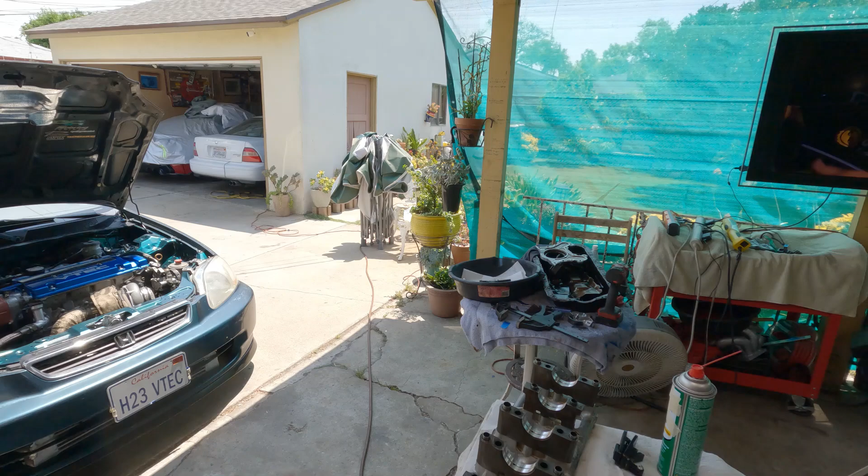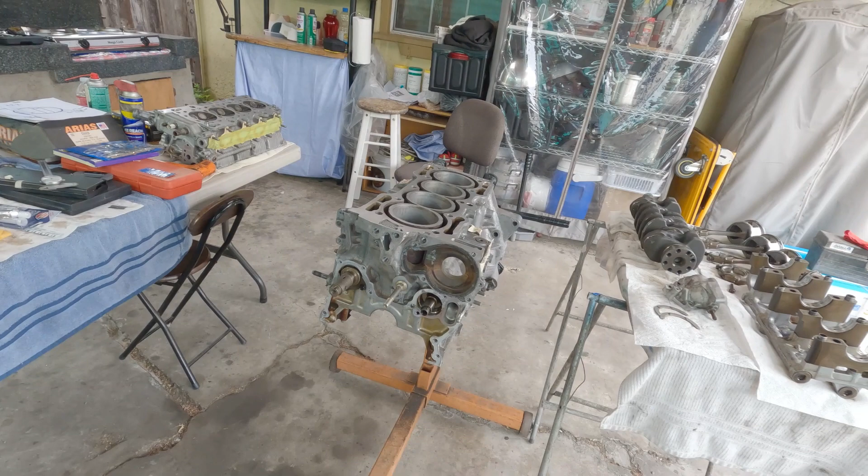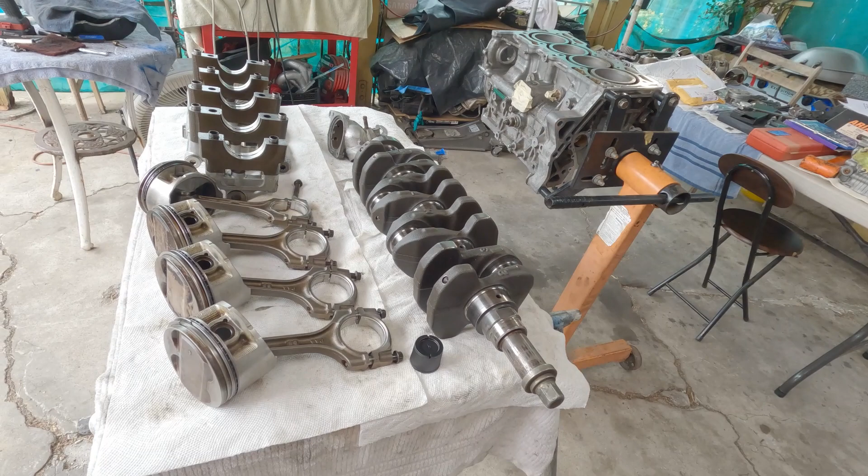Today's episode is how to build a H23 VTEC using an H22A4 block. Picked up a few pieces here and some parts showed up, so I can continue and do a rebuild on this one. And I had told you that I was going to use the same bearings because it has a few thousand miles on it, but I found out that there are a little bit of gouges on the crankshaft journal, so I have decided, oh, what the heck, just go ahead and get me a new set of bearings.

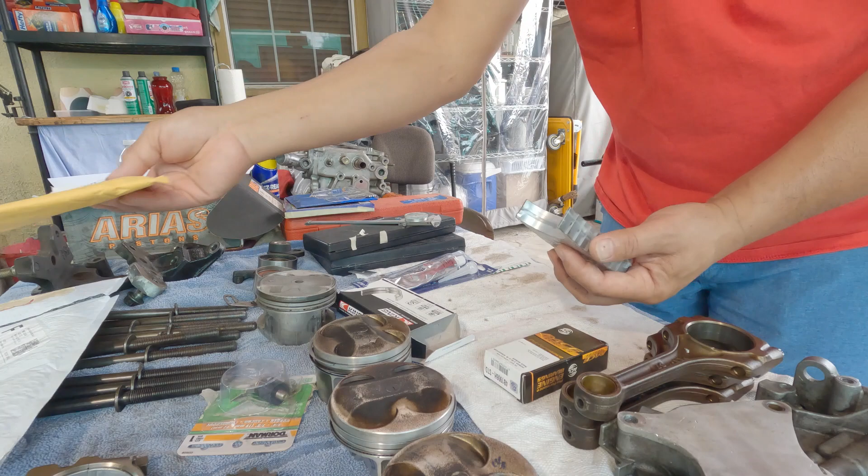Let me see if I ordered the right one. Made in Australia, and it's a standard size. Oh my god. Oh, okay. Whew, they got me there going. This was open, and man, I thought I had a used one, but it's all sealed up. So it opened in the box. It probably got squished during the shipping or something. So yep, there you go.

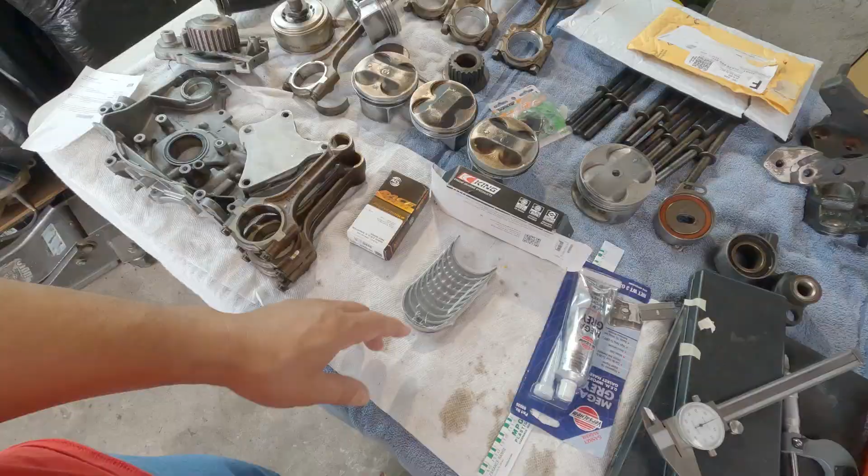I'm using both worlds here. I'm using King and ACL. I always get either King or ACL. So if you ask me why pick King and ACL, or which would be best between the two, I really cannot tell you. I usually just go with whatever's available and whatever is on sale, and with those two brands you can't really go wrong. Clevite is good too. So it's more like I'm on a bargain hunt. Yeah, whatever's on sale. So either or will work.

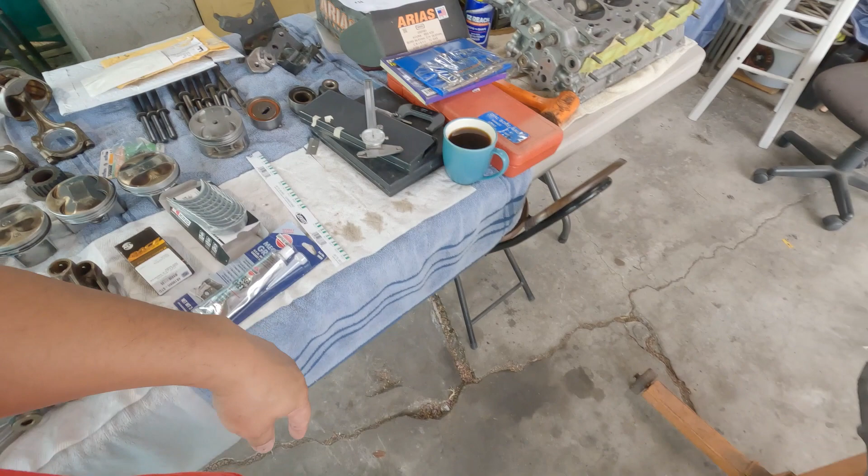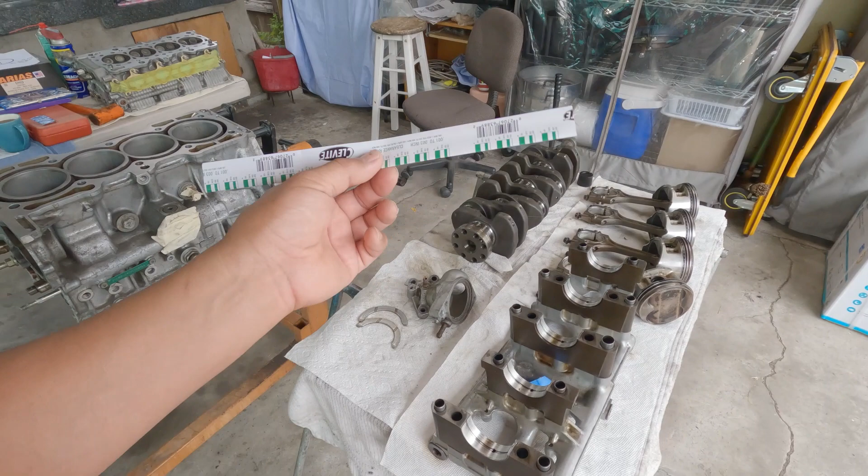If you don't have tools like this, minimal tools required. So when you put this thing together, use this. Some guys hate this, but like I said, for a new beginner, I would suggest using this. Yeah, there are plenty of tutorials on how to use this.

I just remembered, in the last video that I uploaded, remember, this is an H22A4 block. So I am going to remove this F23. I no longer need this for a different block. So now I am back to building an H23 using a 1998 to 2001 Honda Prelude H22A4 block, because it has a 55mm just like the F23. Alright, let's go build this thing.

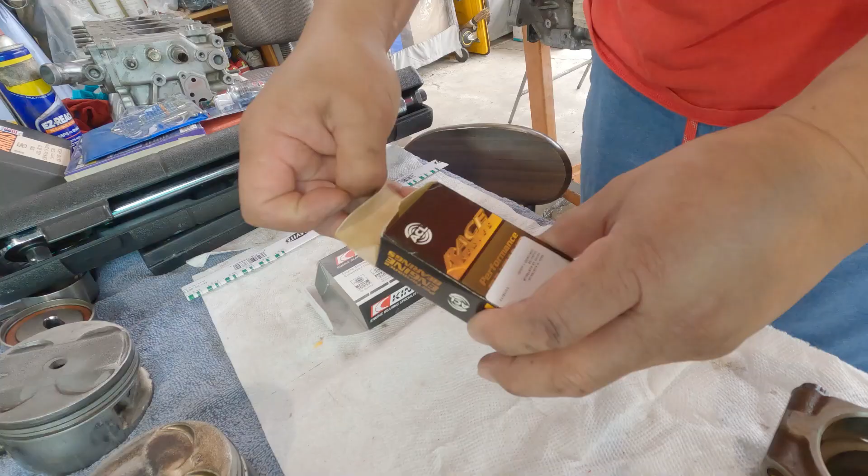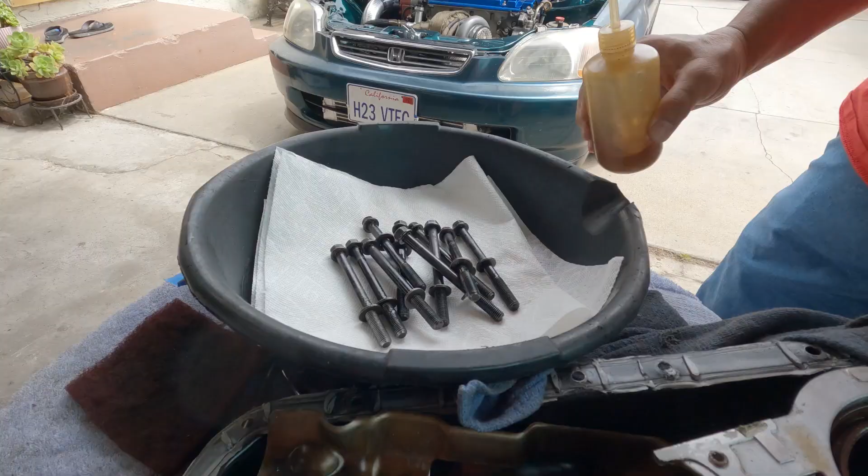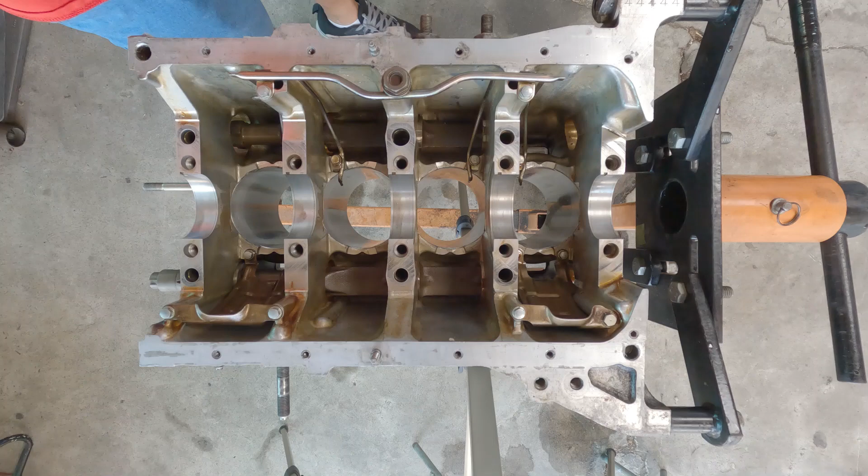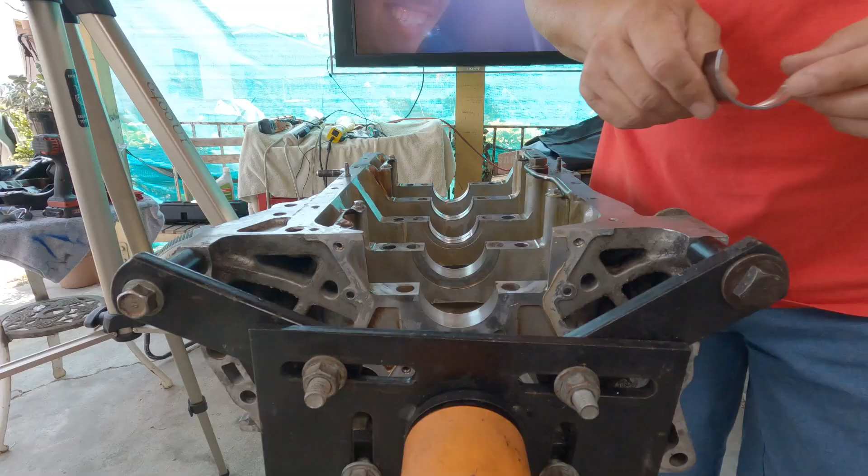I'm using the H22A4 specs as far as the torque and the main bolts. I got my main cap bolts all lubed and everything. Try to do the engine build in a clean environment and make sure you don't put any oil onto here. Make sure it's all dry. Using the Plastigauge is the easiest way of finding your oil clearance. Some people say it's not the best, but for new beginners, you'll be okay. And make sure everything is all dry for now.

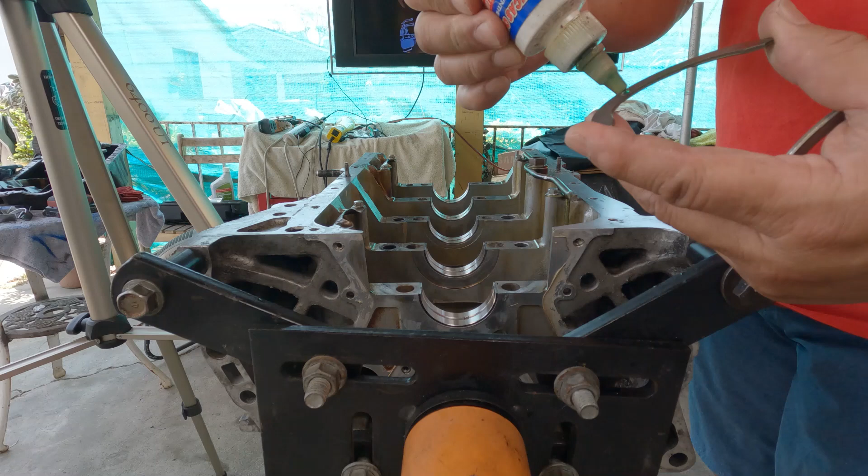Next will be the thrust washer. I'm only applying just a little bit on the face. That way it will stick onto the block. And the groove will be facing the crank. I'm reusing mine. Remember, it doesn't have that much mileage. So if you are building yours, get a new one. Sometimes you'll find a deal where everything is included. It's more like a kit: the mains, the rods, and also the thrust washers. So next will be the crank.

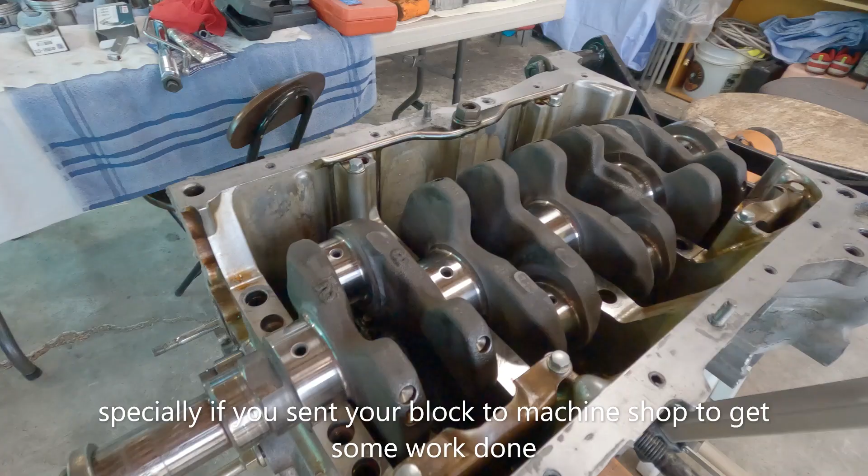Check all the flanges, make sure there's no nick. If there is a gouge or anything like that, some raised material, that's what I'm talking about, just get a file and contour it to flatness. Same thing on the block. Since this is aluminum, if you've seen my video, the center right here was damaged, so I had to remedy that. So just make sure there's no raised material, and if there is, simply get a small file and just file it.

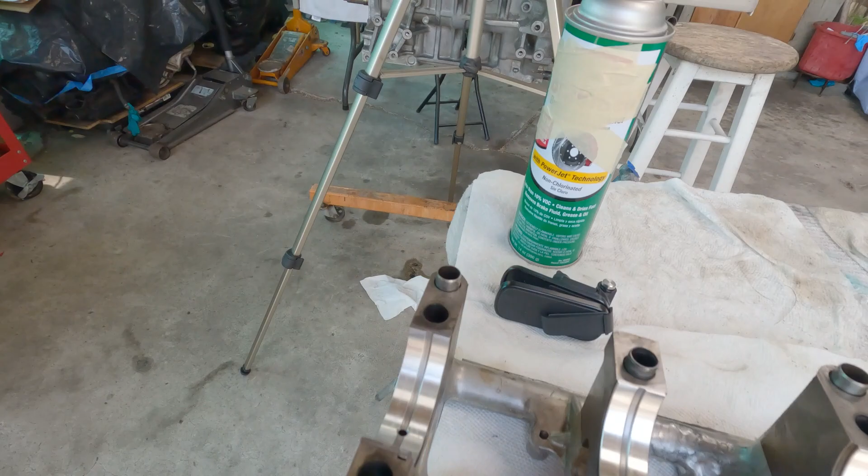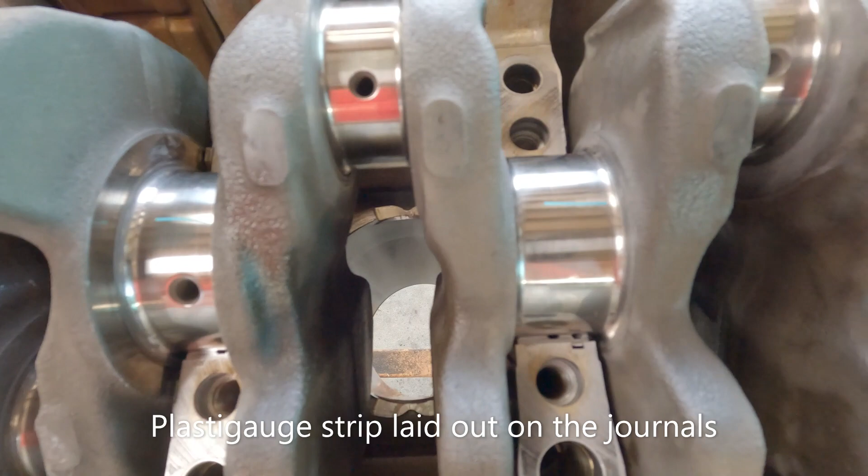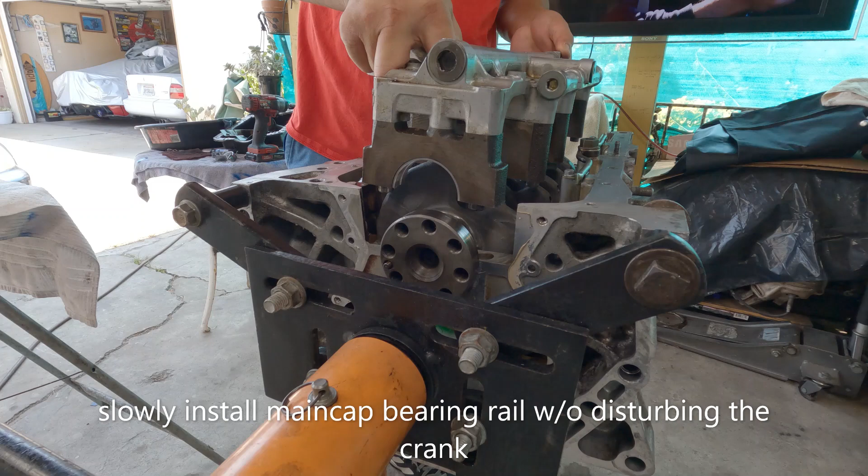Alright, I'm ready for this one, but before I drop it on, I'm going to put this. Put it in the center. You could put it at the bottom before you drop the crank if you wish, or you could do it this way. So everything is installed, it's in the center. This will be followed by your main caps, the girdle. Just slowly put it on there.

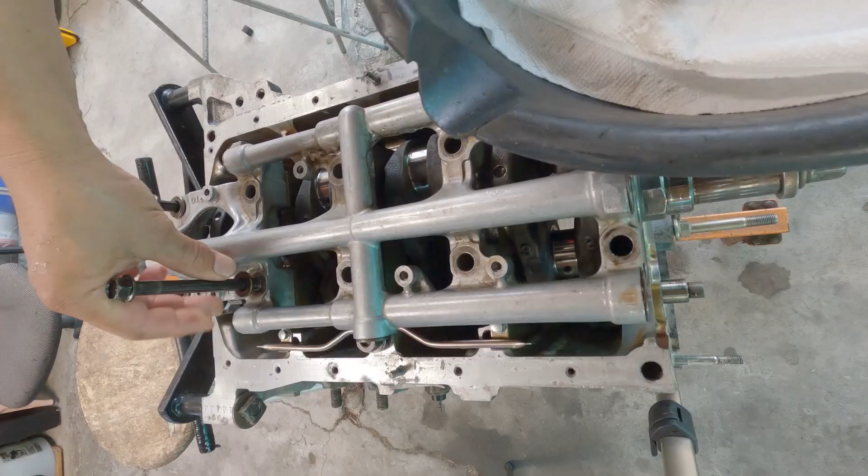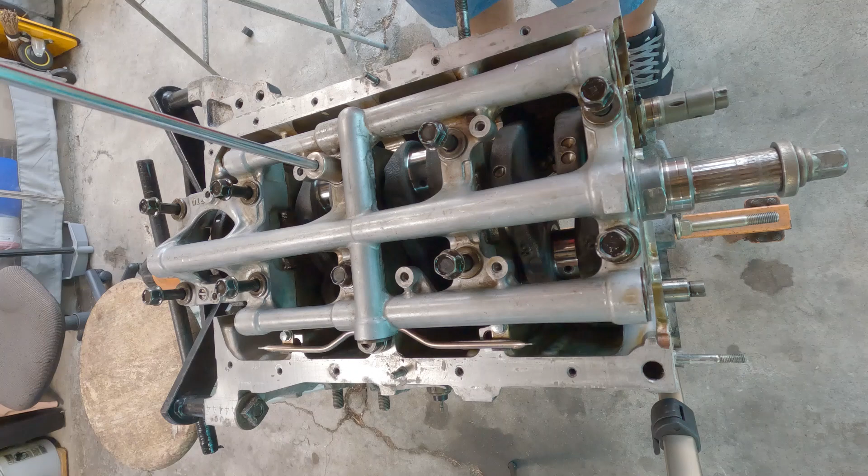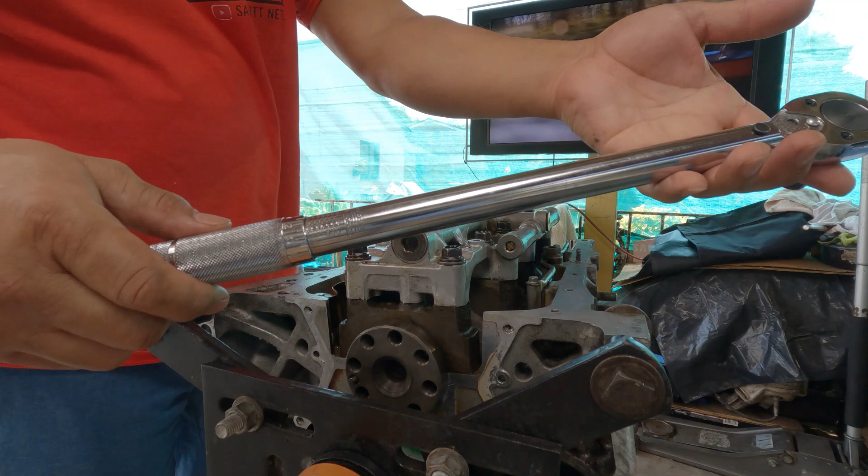And drop in all your bolts. Start from the center. Always follow your service manual. And do it in a crisscross pattern. You can also mark the torque sequence numbers on the flanges. That way you don't get confused. You can see it the first time. Torque is 22 foot-pounds. Try to do it in one shot, one turn.

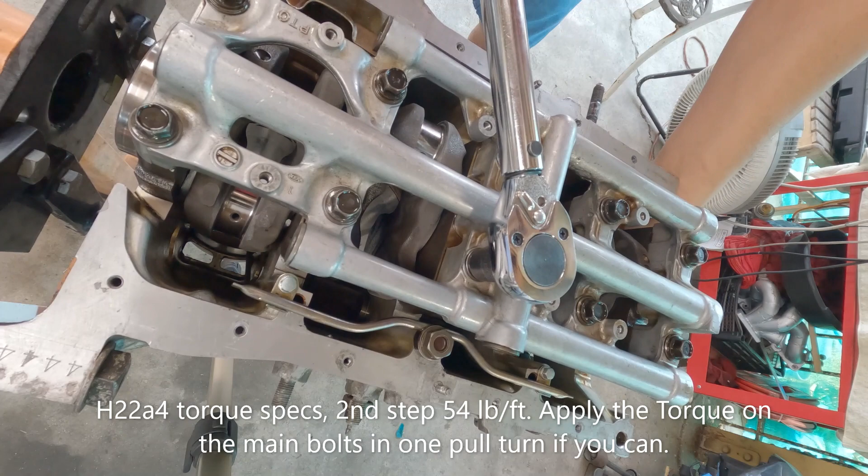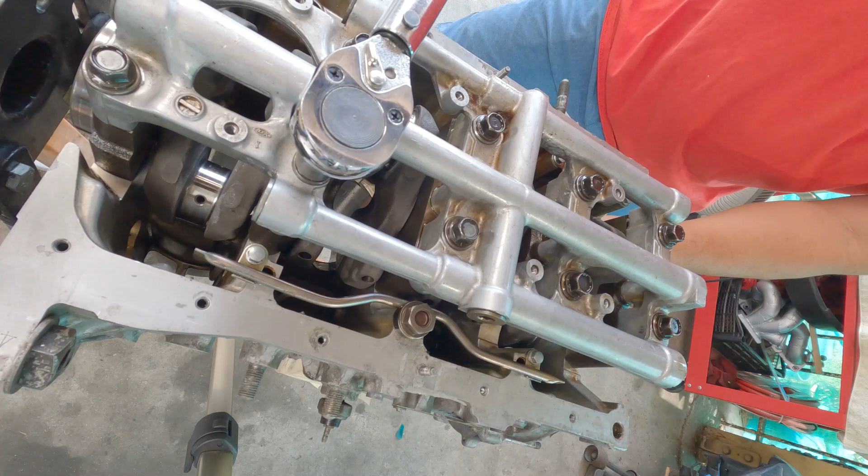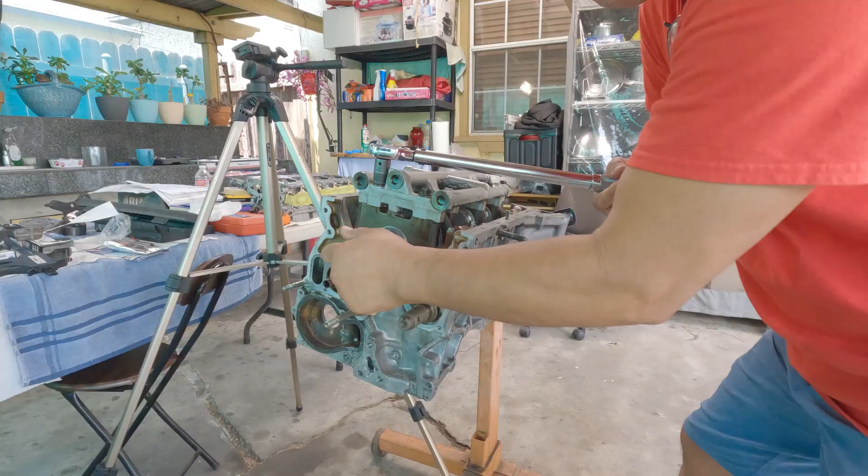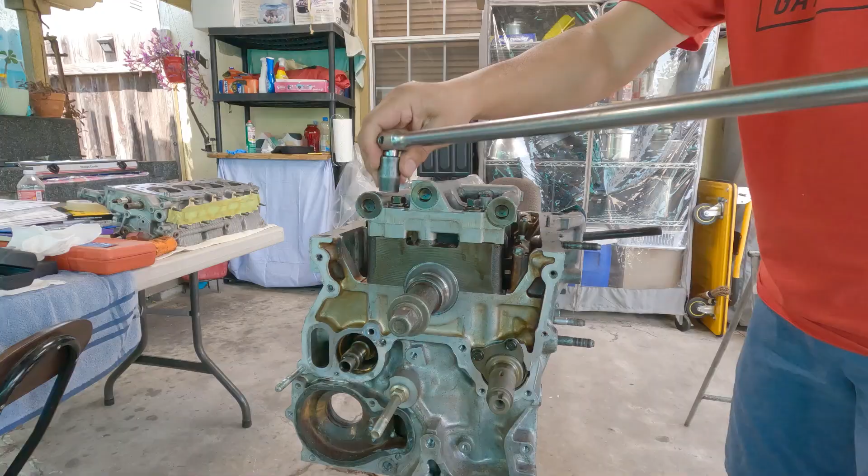Again, crisscross pattern. Do it all in one shot. Alright, so now take it off. Start from the outside, going in. Again, in a crisscross pattern.

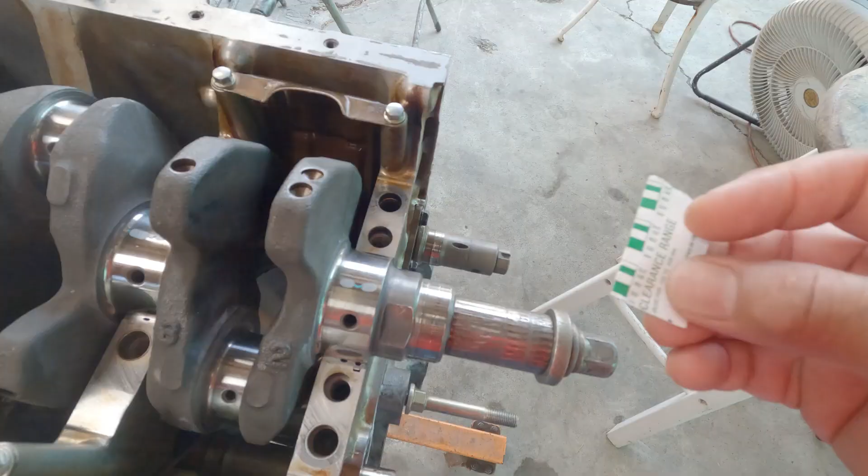Number 1, 1000. It's good. Number 2, it's 1000. Number 4, it's 1000. And number 5 is a little bit over. Yeah. Number 3, it's more than, yeah, it's more than 1000.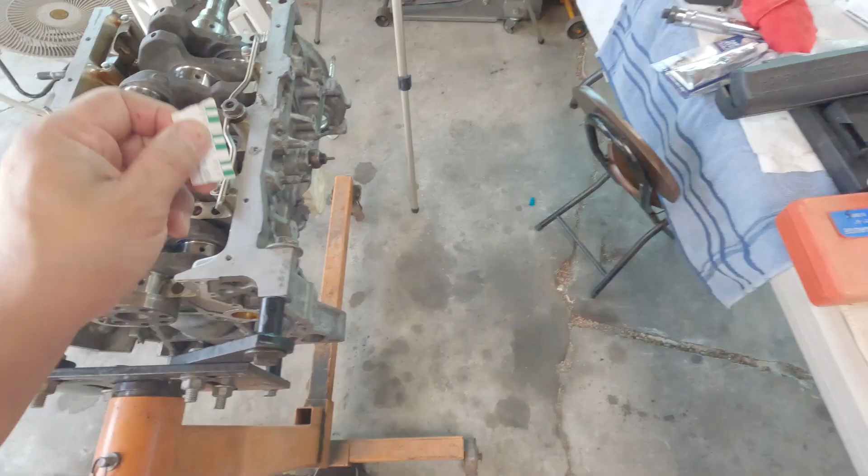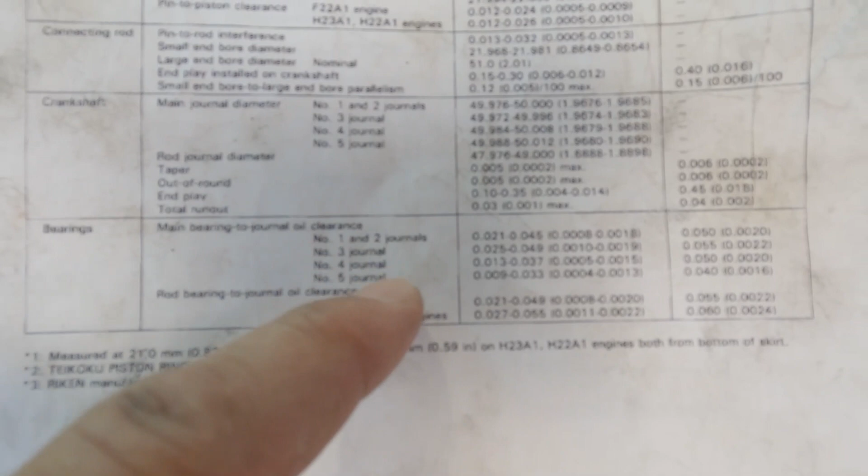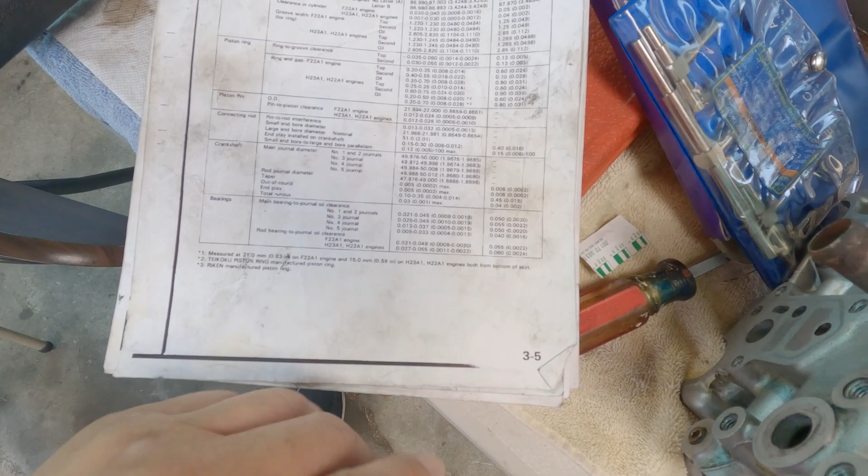So this is the H22 specs. And for bearing oil clearance, number 1, 2, 3, 4, 5. And it looks like, since I got a thousandth and some have a little more than that, I'd say I'm good. Even though this is the 0.050 spec, 0.055 is somewhere around there also. Yeah, I'm not really that far out, I know I'm within limits. So for your build, make sure to check it. Find the specs for whatever block or crank you are using.

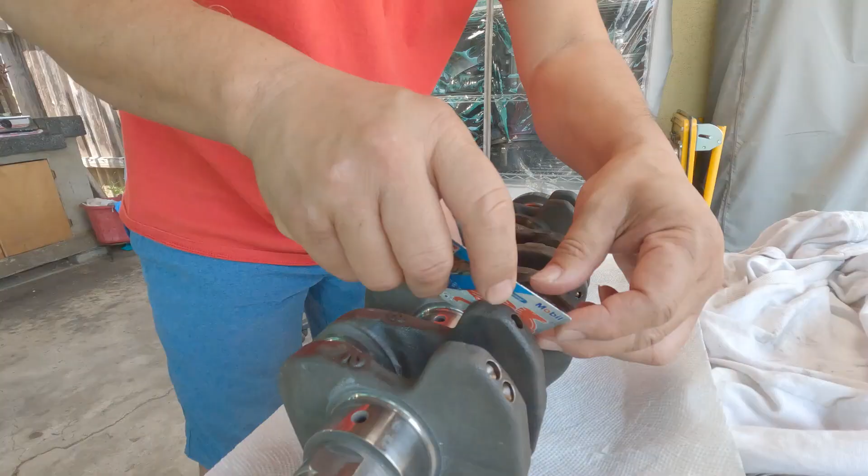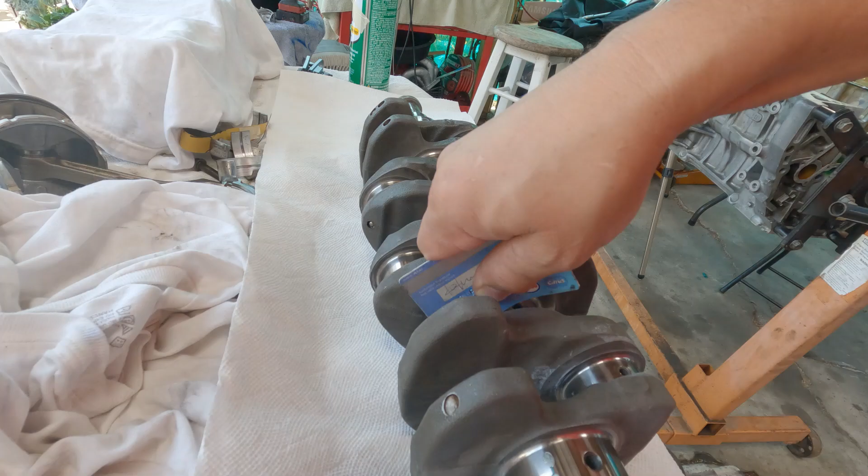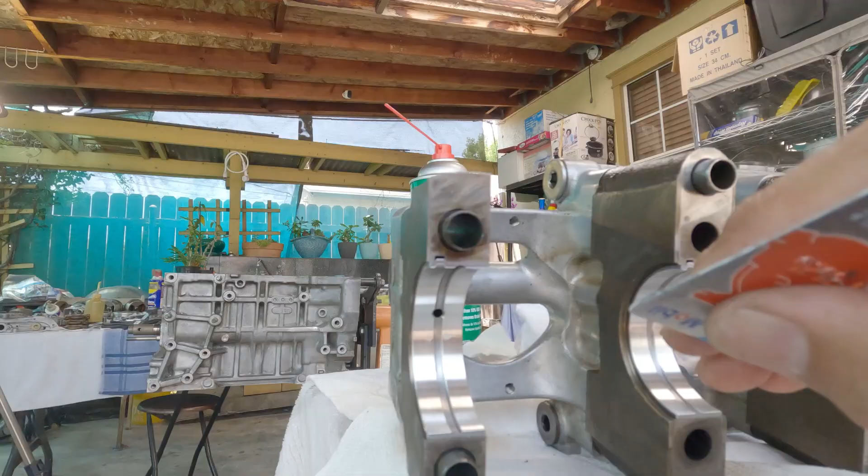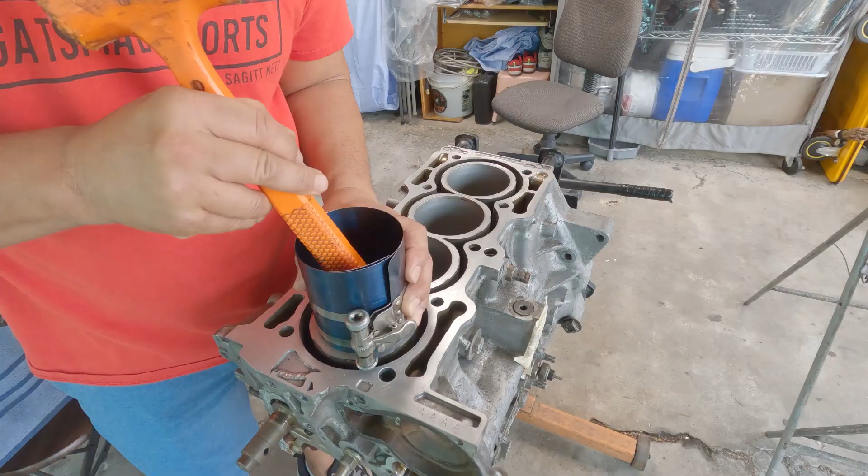So I'm going to clean that up. The easiest way I found to remove those is to scrape it with a credit card. Yeah, just simply scrape it with a credit card. Comes right out. I could clean it inside the block, but I don't want to put anything in there. Yeah, make sure to scrape all that clay out of there. Never use a razor blade or anything like that. There.

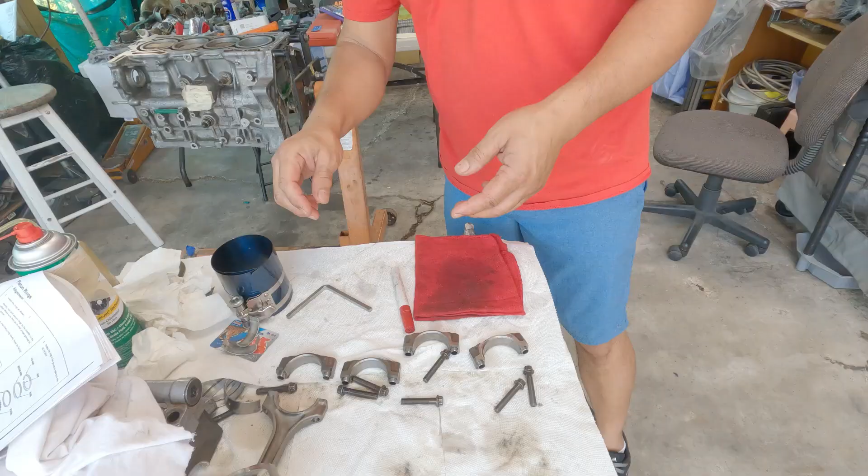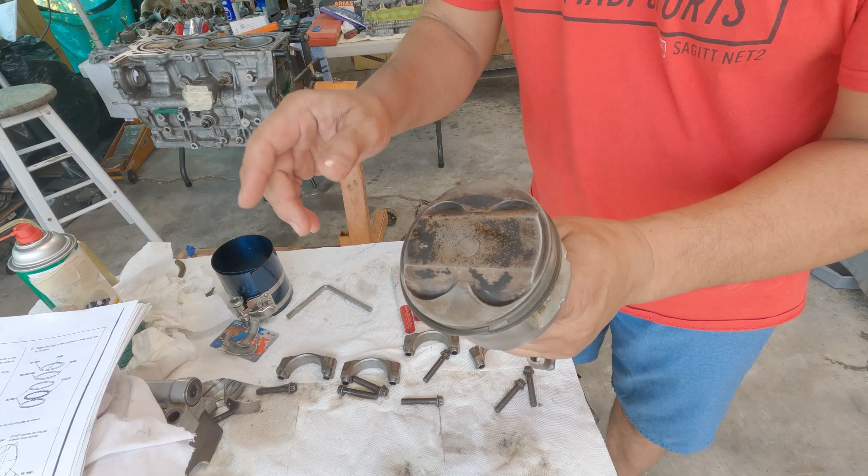Piston ring installation. So since I'm building an F23 using H22A4 and H22A4 piston, the orientation or the location of the seal ring will be plain H22. So if you happen to have a K20A2 piston, let's just say you have 87mm, do not follow the K series, just follow the F23. You're building an F23 or H22A4. It's not K20, so don't get confused.

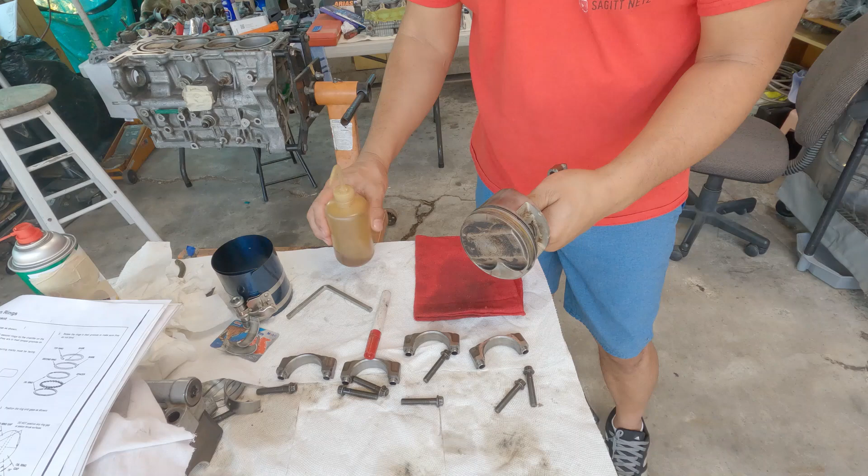And usually for new beginners, so you won't get confused, just mark your piston like so. Just copy those markings and transfer it to your piston, and right here, so the top, second is right there, and then the rest is over here. Then after that, make sure to oil it. Make sure the gap on the spacer, the third one, is on there correctly, because if not, it's gonna get hung up.

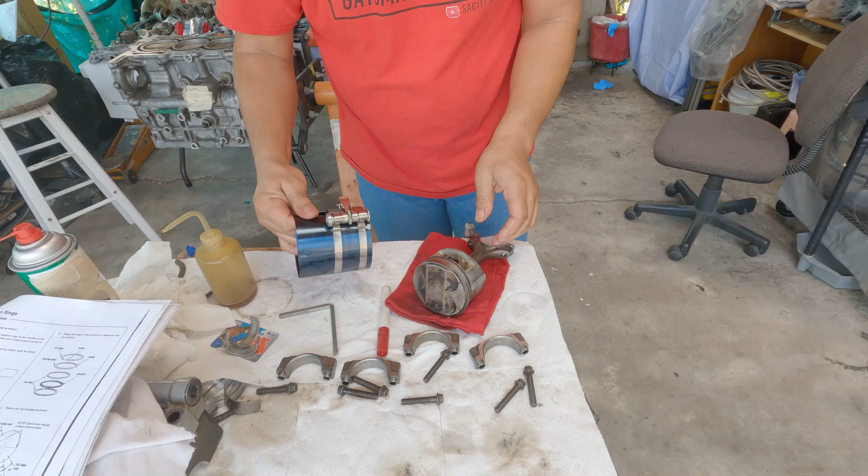And you should get a minimum tool required, and just make sure to verify that the gap is not aligned to the pin. But don't worry, the seal rings, they said, are supposed to rotate in there, and just simply put it on like so. You don't want to put your tool all the way here. Remember, the piston is not really straight, it's tapered. Over here it's wider than the one on the top, so you want to squeeze it past the last groove. And then when I put it on, I'll show you more.

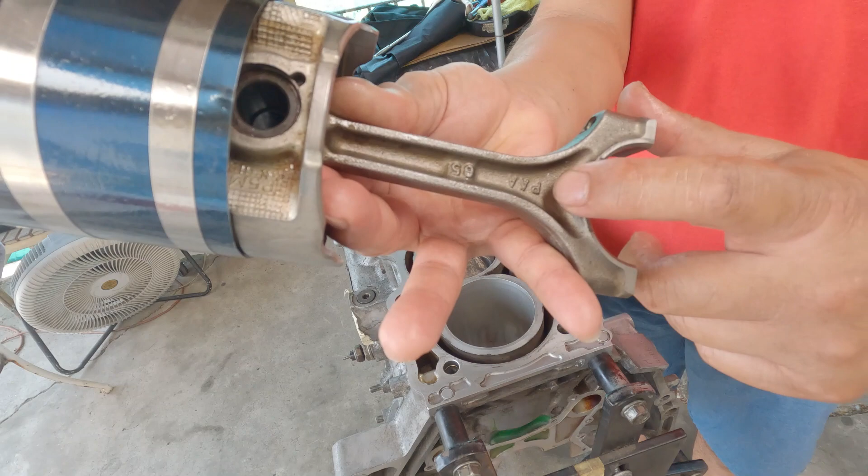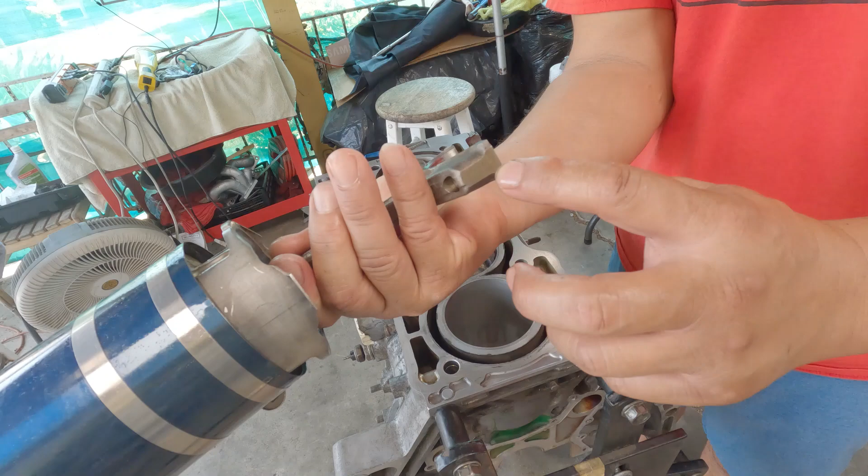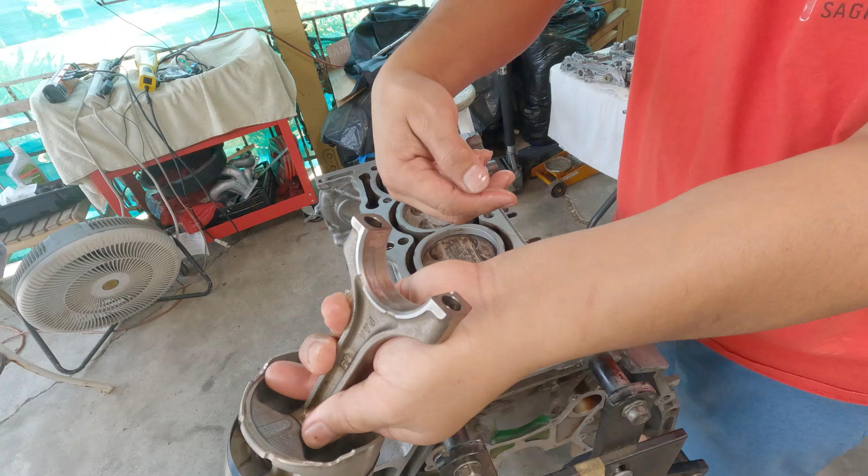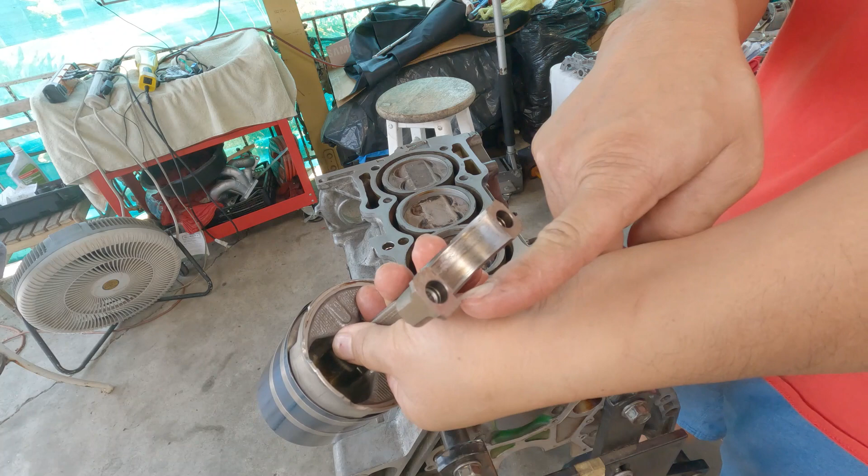Remember the stamp, the PAA right there? That has to face the timing belt. And also the cap for here, make sure you follow the directions on your installation manual, okay? If you're using a forged connecting rod, it would not have a marking, not unless you marked it. And those notches have to be on the exhaust side area. So there's my stamp, so I'm gonna face it like this. Remember the groove, the notch right there? So if I flip it like this, then it'll be facing the exhaust side.

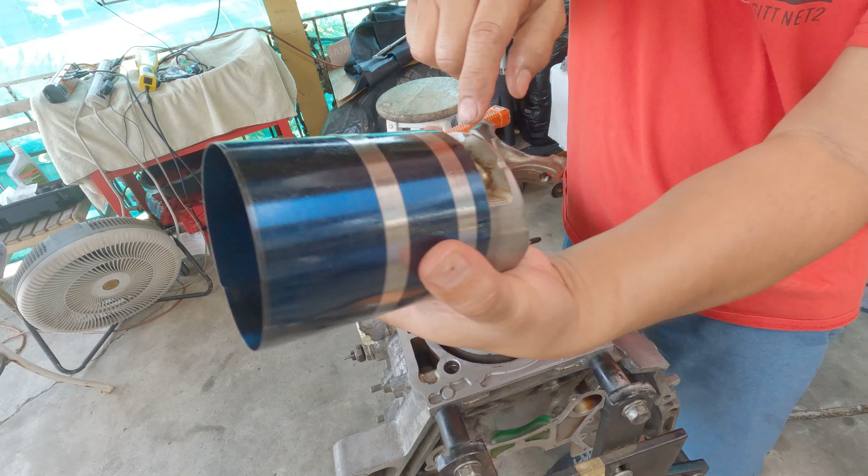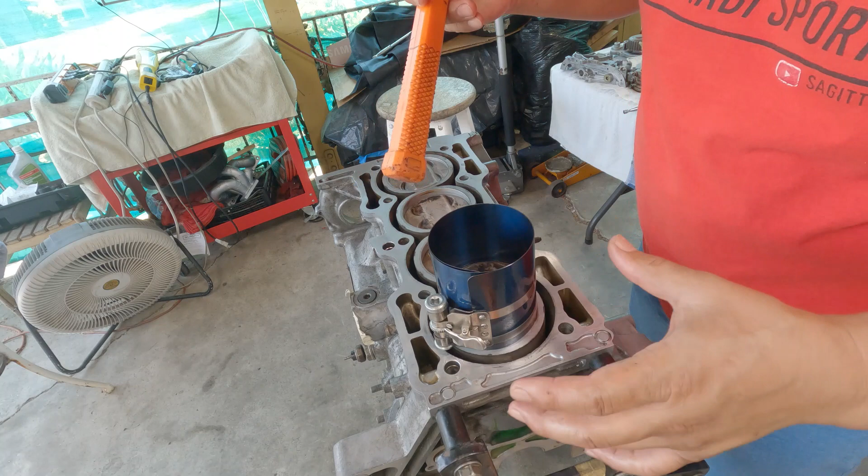So as soon as it goes in there, and also if you have OEM piston, then the arrow, if you build it correctly, will be aligned to this. So make sure that arrow is facing the timing belt. And just simply tap the top of your tool. That way everything will be square or flat. And if you can, give it another squeeze there. That's just to squeeze the seal ring more, and give it a light tap. And if you feel like it's not going in, stop and then redo it again. It should go in like that, and you're good to go.

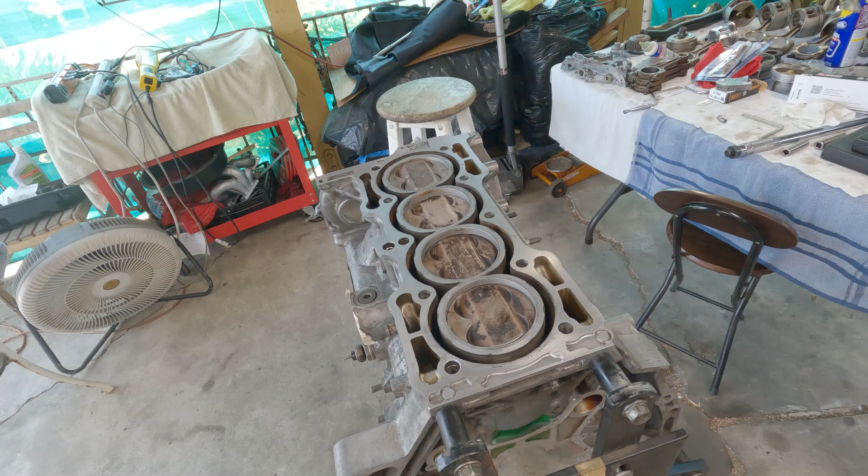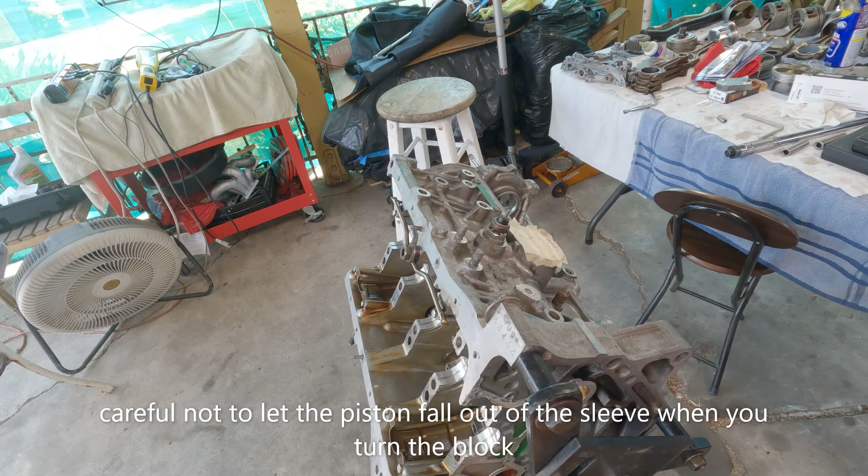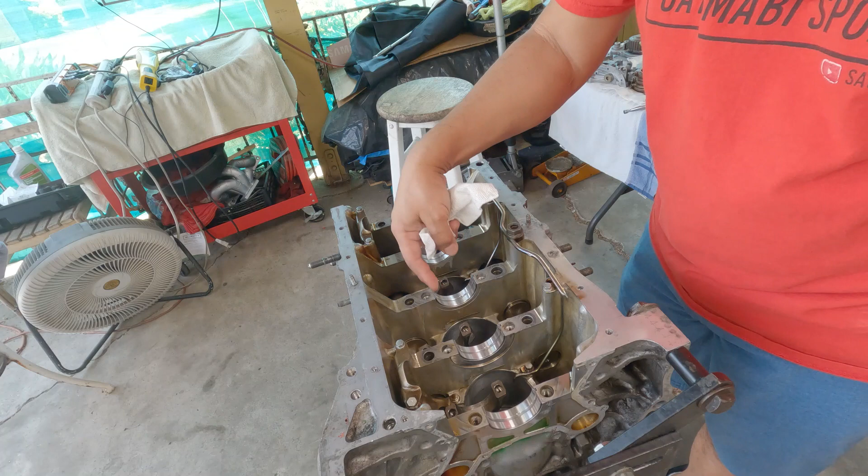All right, now, so I'm gonna flip it, that way I could put it in just slowly, because of the connecting rods, you don't want that thing to be banging in there. Then I'm going to put the bearing. Make sure there's no oil at the back. This is my ACL. And just simply align the notches. Pay attention to those notches on the rods. So let me set this up. Make sure your thrust washer is put on, the groove facing the crank.

And line up your crank to the rods. Just do it slow. Okay, I got those two lined up. Now just wipe that one. There. All right, I'm gonna leave it as this, and then I'm gonna put my Plastigauge, and then put the caps on.

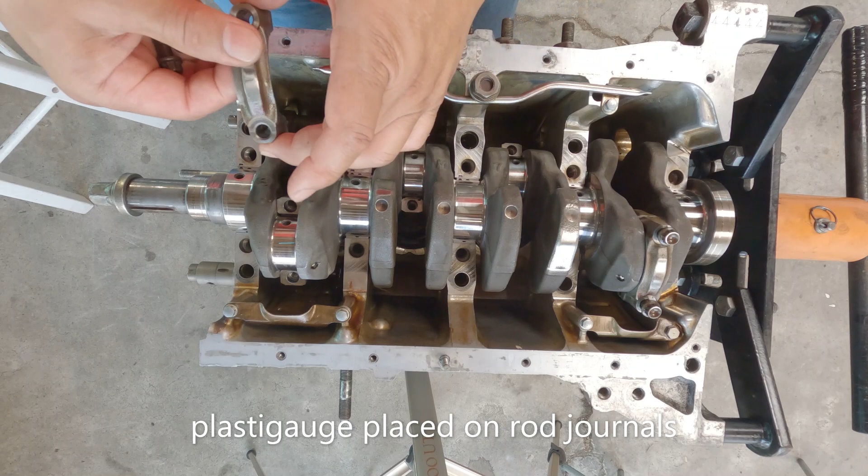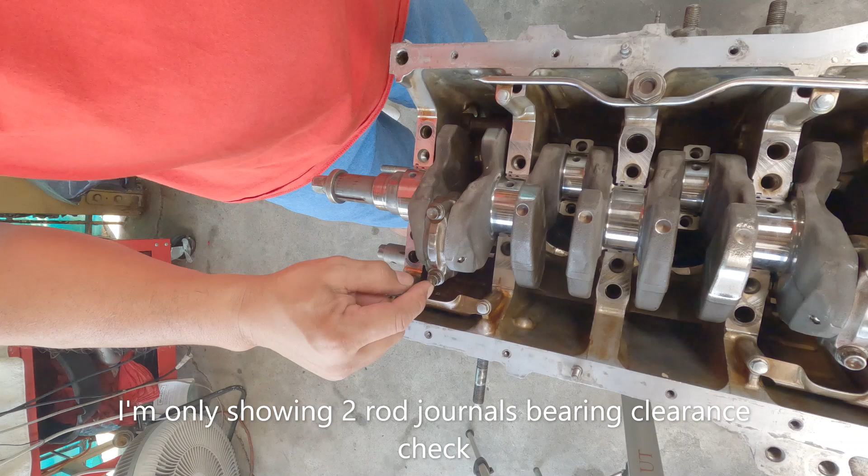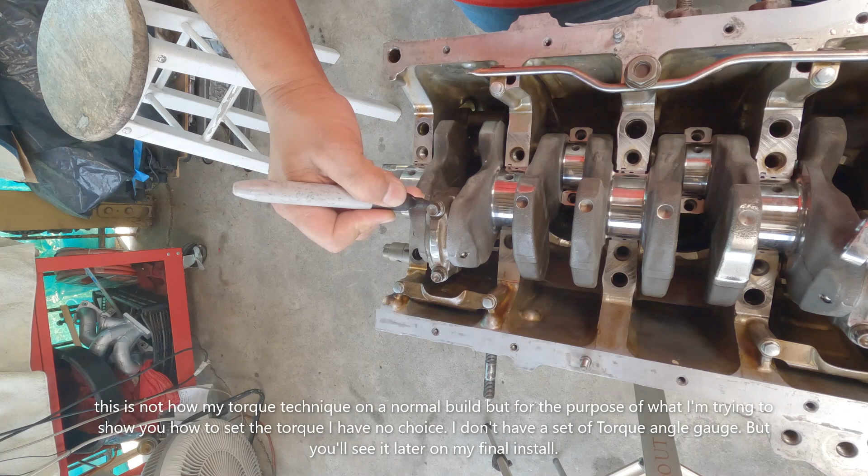Remember, this is a matched set, so don't mix and match. And just carefully put it all together. F23 connecting rod bolts require 14 pound-feet, and then from there you give it another 90-degree turn. I converted it into inches, so that's 168. So give it an initial torque there. Simple instructions like this, just put a mark 90 and here line it up there. So if I put my wrench on here and turn it and put that mark there, that's 90.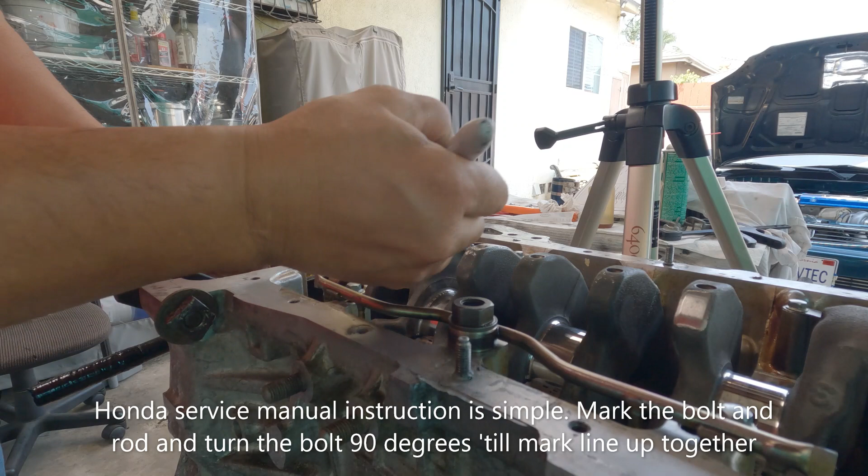Alright, one more there. I'll do the same thing here. So this will be a line right there. So look at this. I got my tool right here. So I'm going to stop from where that mark would be. A little more, just there. Initial torque 168. Right there. I could just use this torque wrench, but let me mark it. So right there, 90-degree. Right there.

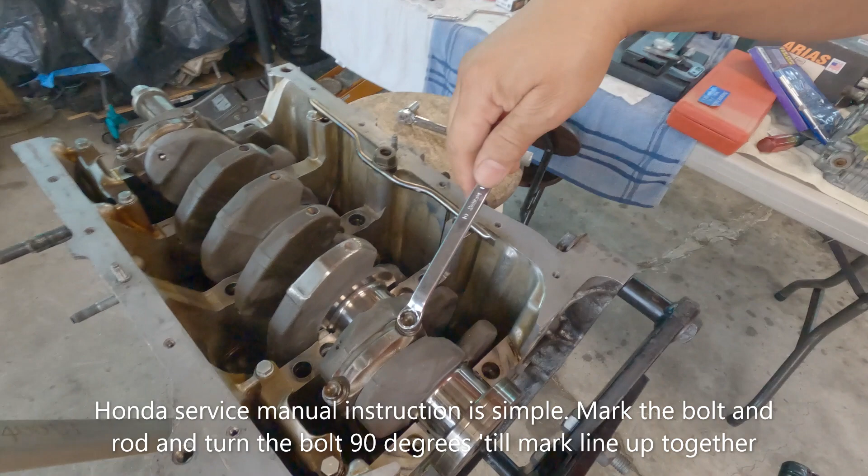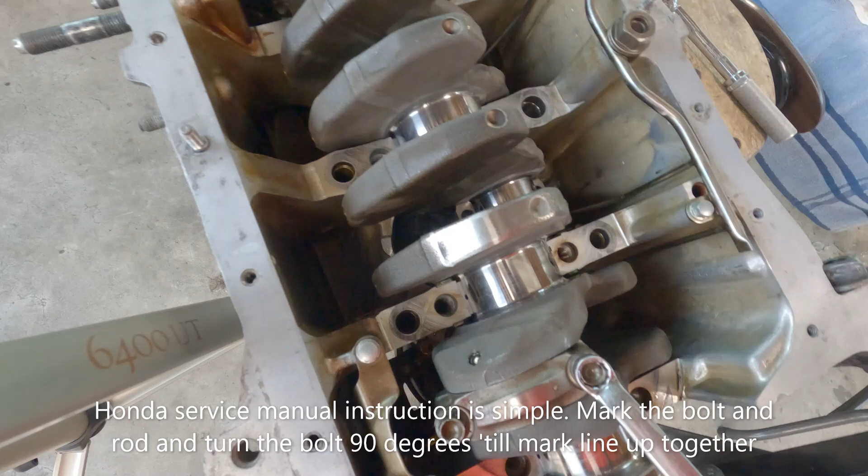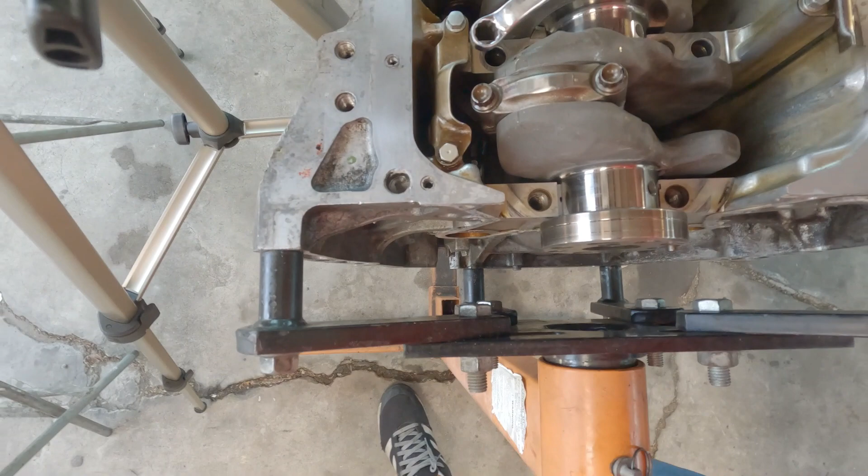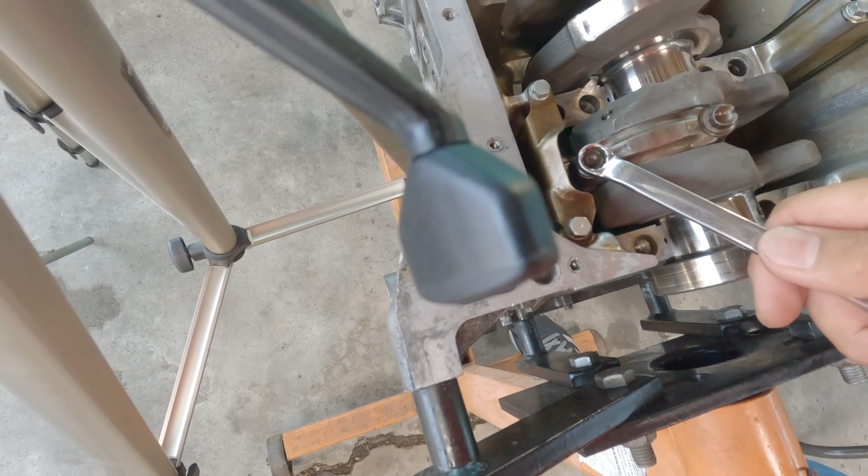Yes, can see it. There's my mark. Any more? There. More. Right there. See that mark? Line up there. And that's it. Then I'm gonna break it off again, take it off, and then check the Plastigage.

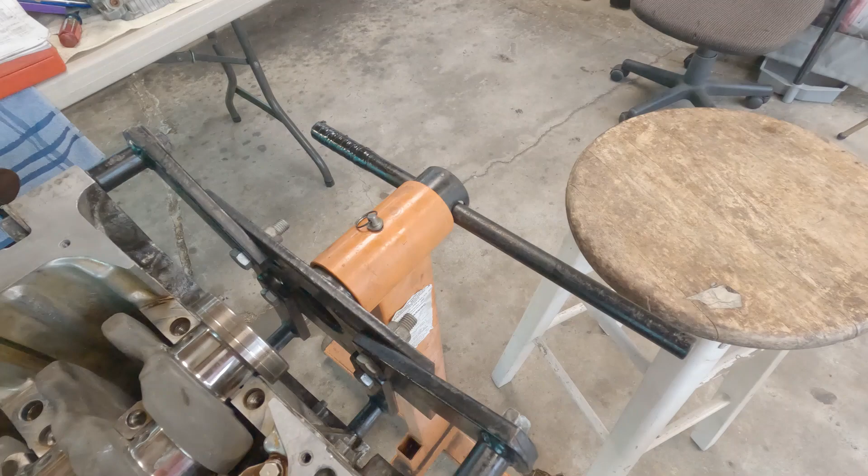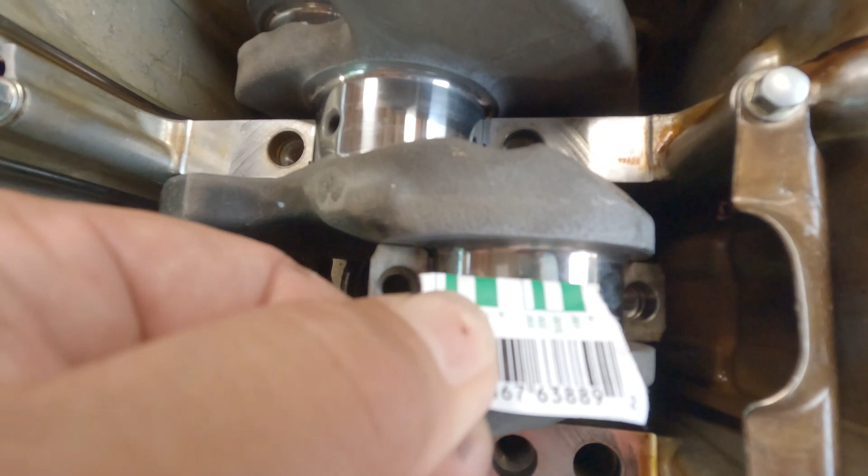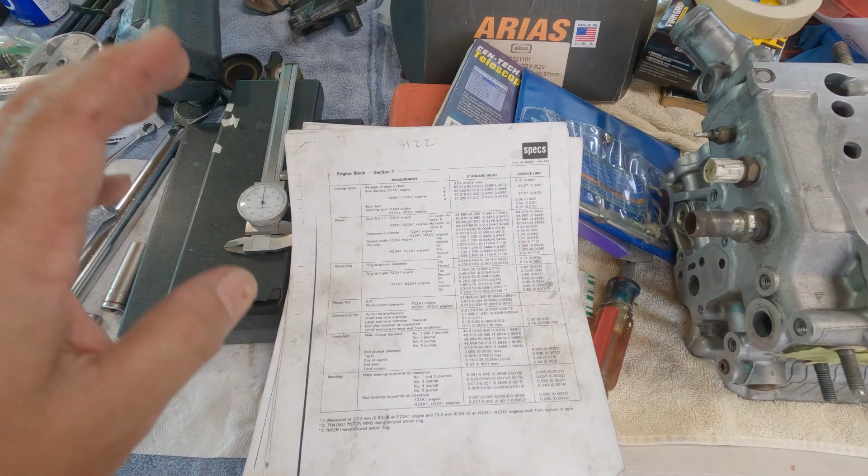You get these and simply match it up. It looks like the 1,500. Yeah, 1,000 is too big. Yeah, 1.5. This one, yeah, 1.5. So I'm using H22 specs, but I'm building F23 connecting rods. If there is a difference, we're only talking about maybe 1/10 of a thousandth. It's very rare that it would change a whole lot.

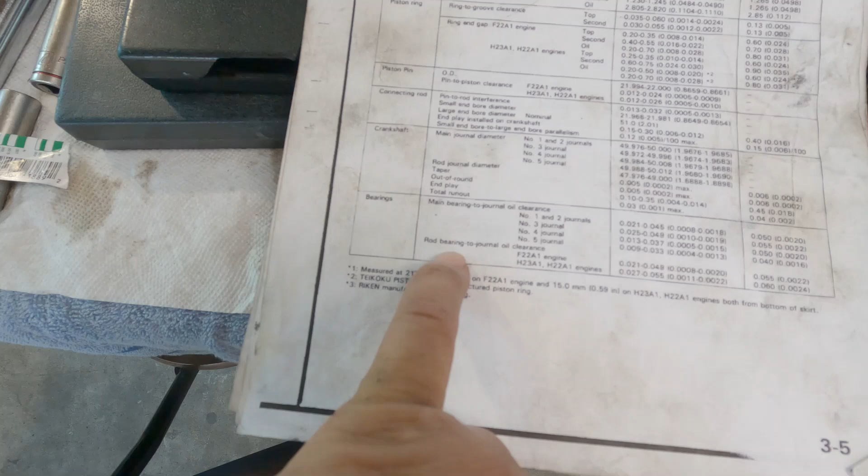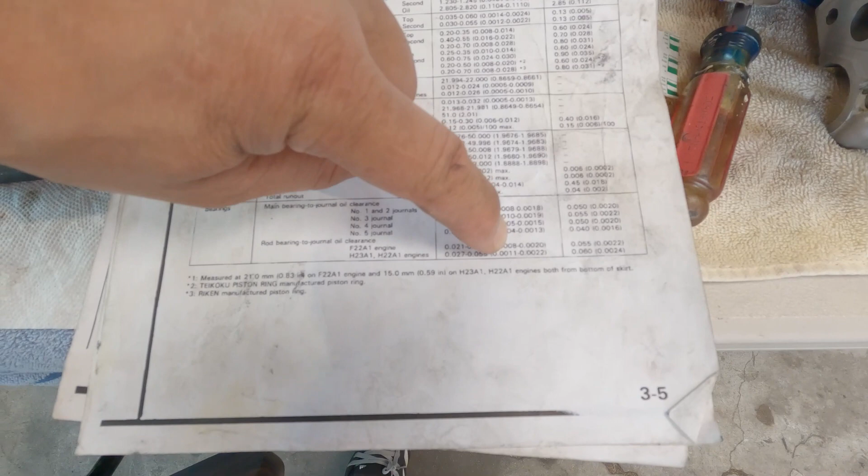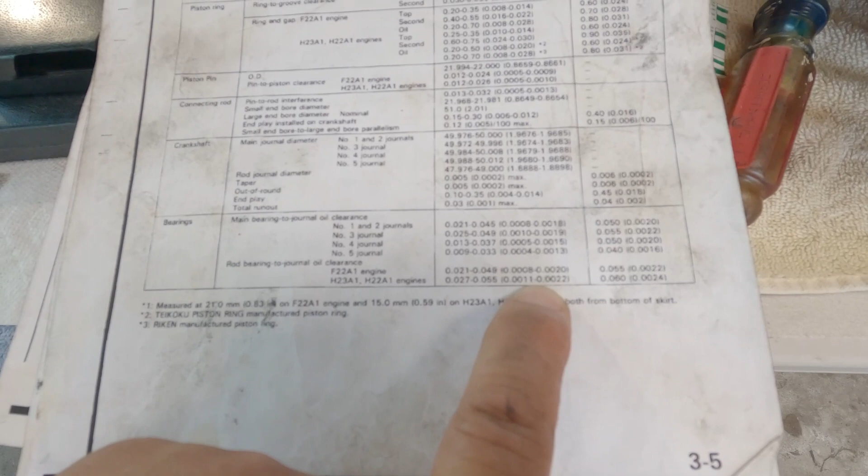So rod bearing to journal oil clearance there, and see right there, that's 3/10,000 difference. And look at the maximum or even the service limit. As long as I don't go past the service limit, I'll be okay. But I have 1.5, so H23, H22 right there, 11 right there, so mine is 1.5, so I'm good. And that's it for the oil clearance.

All right, when I put it all together, I'm gonna show you another trick that I learned. So I'm going to clean that up again and remove it and make sure it's all clean, and then I'm gonna lube it up and assemble it.